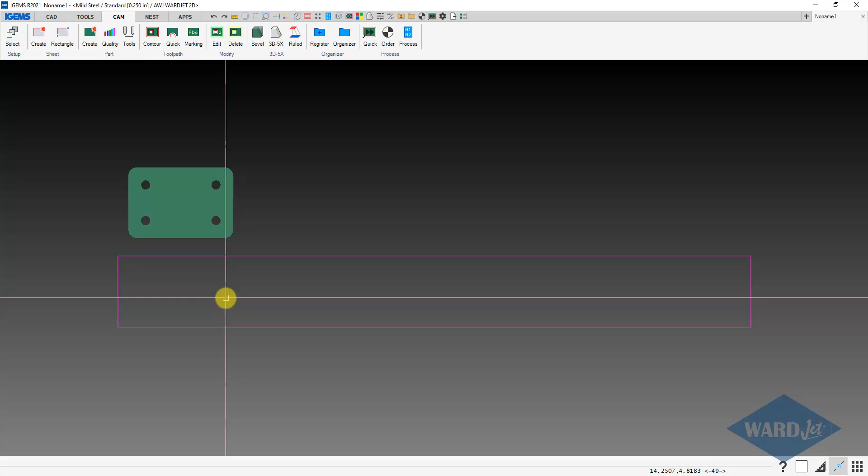You may come across a situation where you want to cut a part that's the exact width of the piece of material you're cutting it out of. So we've got a piece of bar stock here that's 4 inches wide, and our part's 4 inches wide. So obviously we want to cut the inside holes and then be able to start off the edge of the sheet.

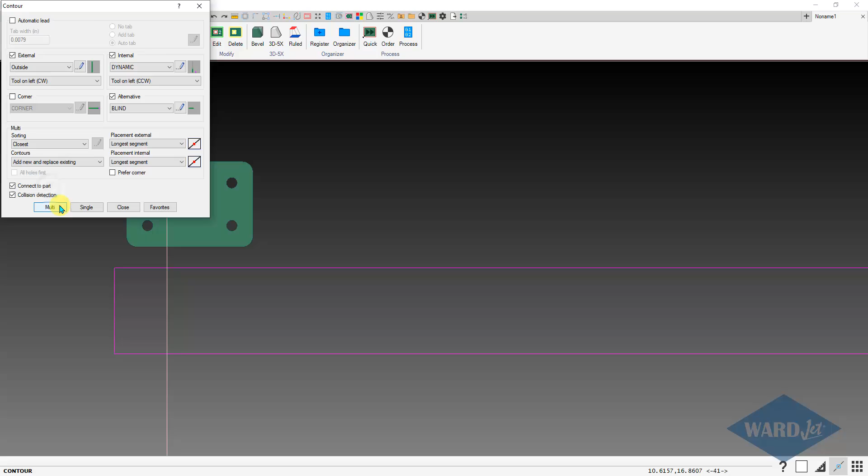Trim off one end and then come over here and trim off this other end. So I'll go ahead and add my tool path on here. And of course, if I try to just nest this on the sheet, let me stick this on the end here.

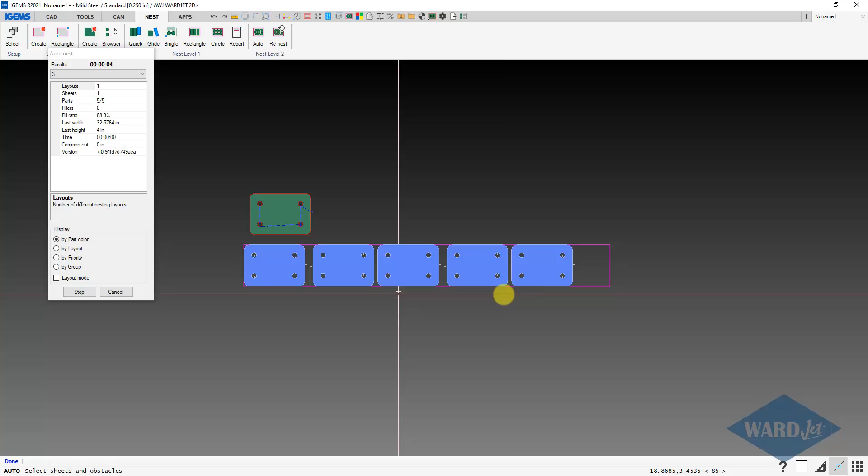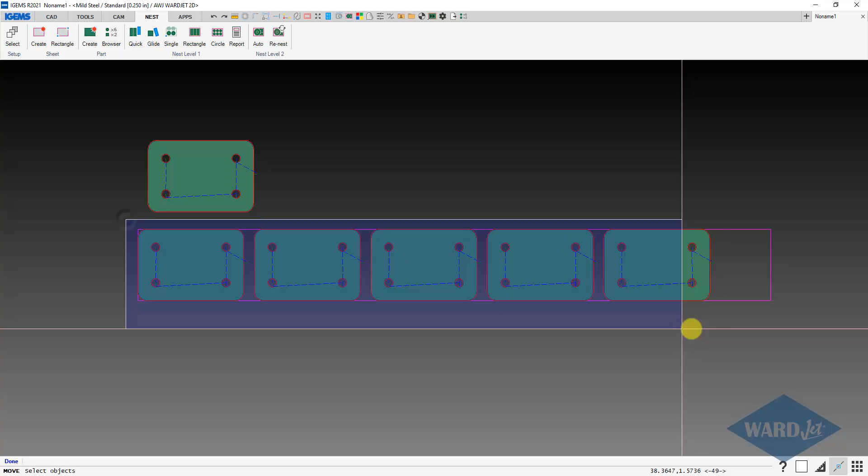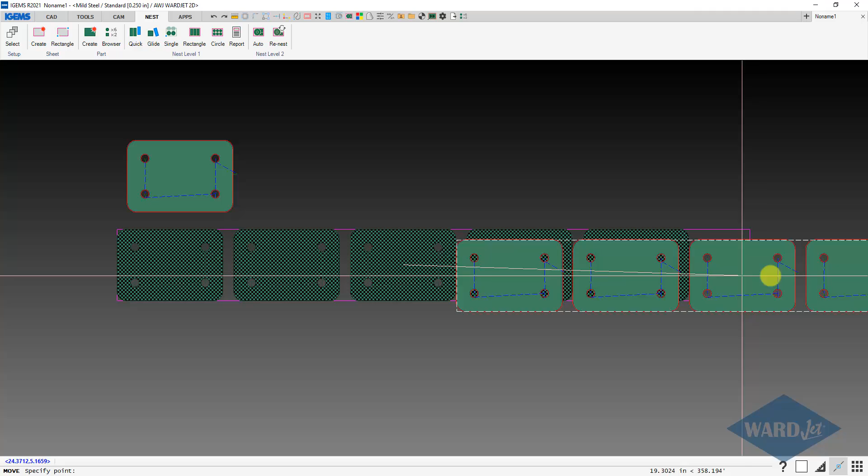And if I'm going to want to clamp these onto the end, I can slide this down center a little bit there on my sheet. If I want to be really particular about that centering, when I select the parts and do my move command, it's going to pick a point that's in the center of those. Hit enter, base point. If I do R, the R snap is the centroid, and if I hover on the perimeter of the sheet, then it'll find the center of that sheet there.

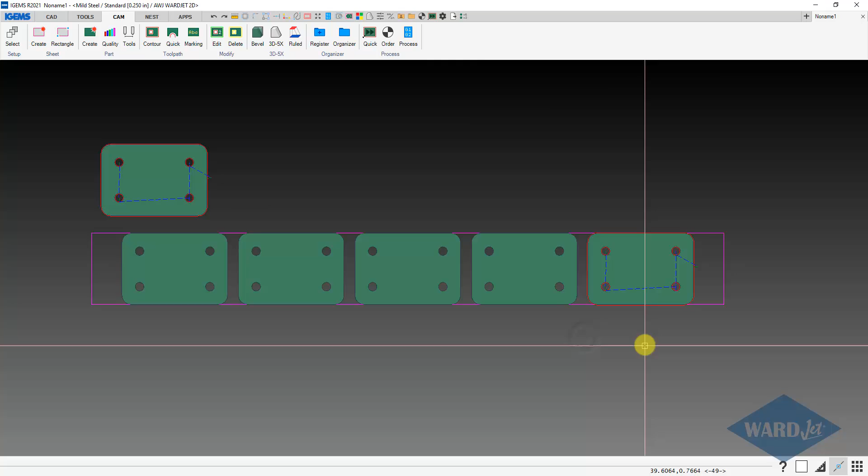So of course we try to go cut this. We've got the cuts along the edge here that we really don't need. So this is where on the cam tab, the quick command can come in handy. So I'm actually going to delete all these tool paths off of here for right now, and we're going to also delete the tool path off of this part.

And then we're going to use our quick command, and we're going to use the contour option, and I'm going to work my way essentially counterclockwise around this part. We're going to start with the cut on the right end because we don't want to necessarily do the one on the left end first, because then the part will come free from our bar stock and float.

So we'd want to work right to left on here, I'm envisioning, cutting the right end first. So we're going to start down here, have our tool compensation on the right, and then come over here and start at the top and work our way down, also with the tool compensation on the right. So we've got the contour option selected, tool on the right. I'm using the user piercing option just to pierce off the edge there. I've got a lead-in length, lead-out length, and then normally this connect-to box is checked.

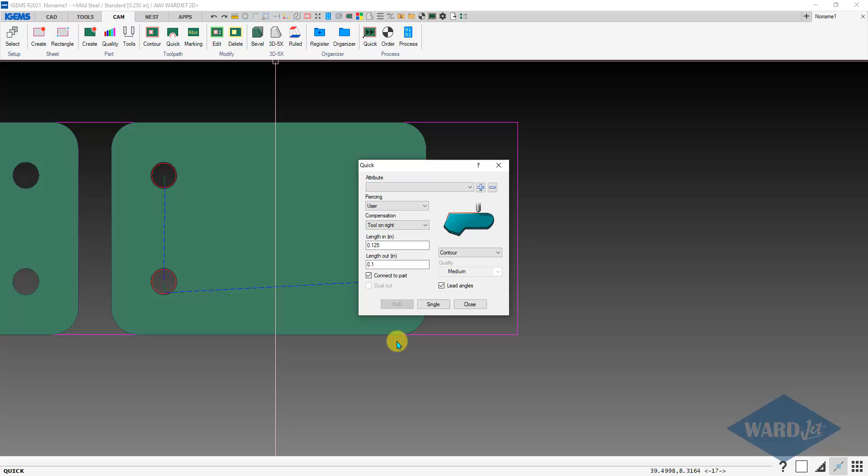We'll show you what we'll do here with that later. And then lead angles, so if you want to be able to specify the angle that you want to lead in at, you have this box checked. And click single. Down here at the bottom, select start point.

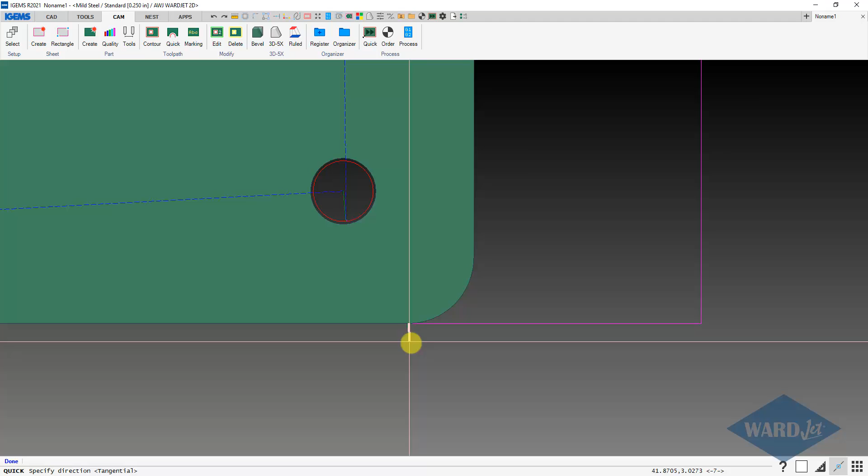So we're going to start down here. It finds the closest end point, and then we're going to left click up here so it knows where it's going to start and end. Now it just wants to know information about the lead-in, which is what it's asking for right now. So I've got my ortho currently off, so I can move this around, and I just left click in the angle I want to lead in at.

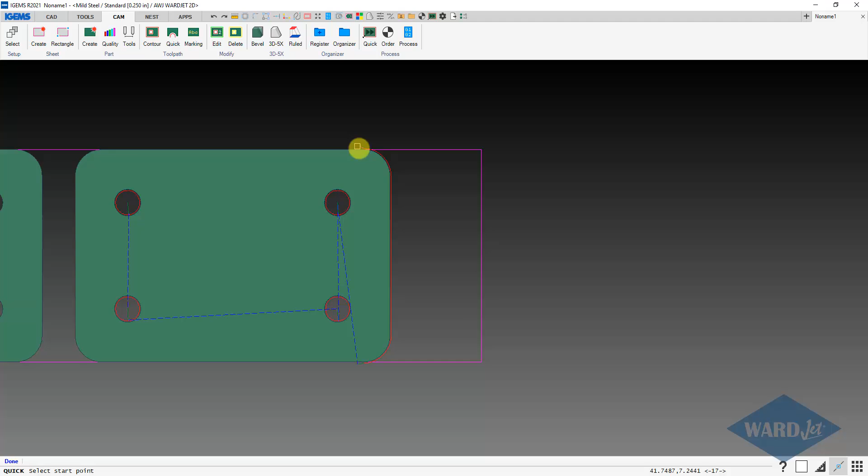And same thing for my lead out, I can position that how I want to lead out, if I want to come at 90 degrees, whatever. So we'll left click, and we've got our lead out there. Lead in and lead out, and then we can do the same thing down here at the left end. We're going to start up here this time and end down here, then left click for lead in, left click for my lead out, and hit enter because we're done with that, and close it.

So right now this tool path is connected to the part. If I click on the tool path, it selects the part.

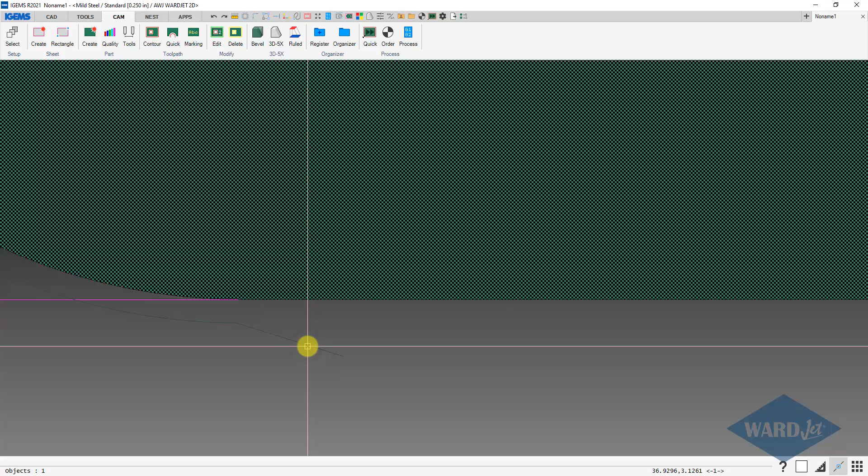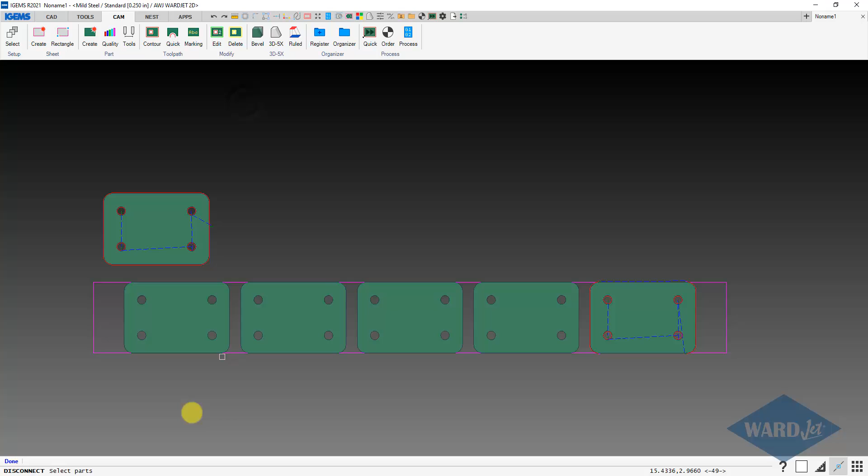So I can disconnect this tool path from the part and then copy that to my other parts, so I don't have to do the same thing 5-6 times. Under the modify submenu on the CAM tab, you have the disconnect option, and select parts. We want to disconnect from this part here. So now when I click on the tool path, you'll see that it just selects the tool path and not the parts. So now I can move and copy and such.

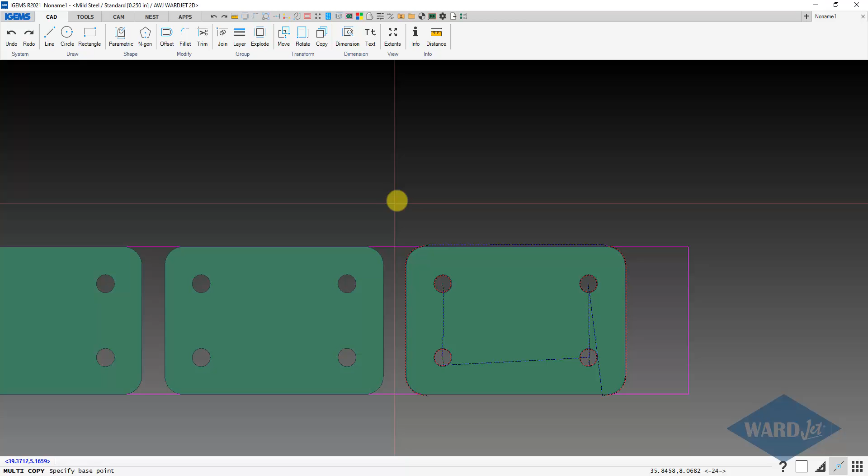CAD tab, we'll use our copy command, and we're going to select that tool path, hit enter. Base point, I'm going to go with center point. We'll go center point to center point to center point, and so on. Okay, so we've got that.

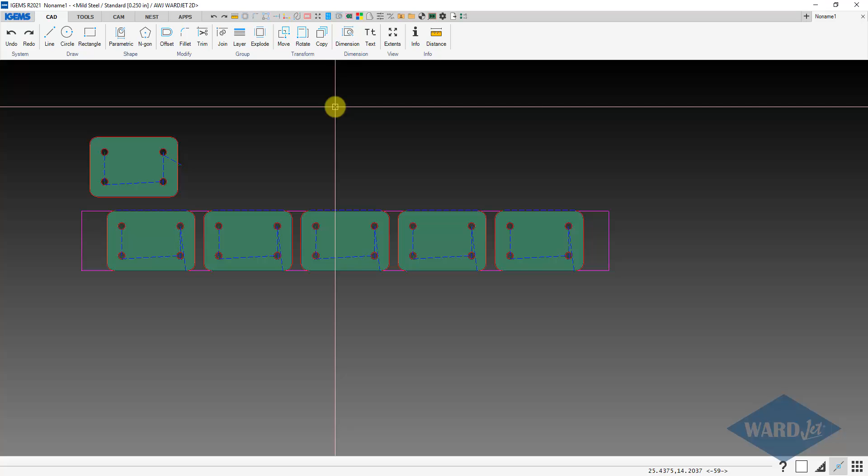So now we can go ahead, CAM tab, we can do our order button. Depending on how you've got this set, by default, you might have that set as closest.

In that case, it's going to probably start with the part on the left and want to work from left to right. Again, we probably don't want to go in that order because the parts will start floating and be free depending on how we got this clamped down and such. So ideally, we probably want to start with this part on the right.

So a couple different options to do that. You could do the right to left option. Anytime you change the sorting options, just click on sort again. It actually applies that. So in that case, it would start and do that.

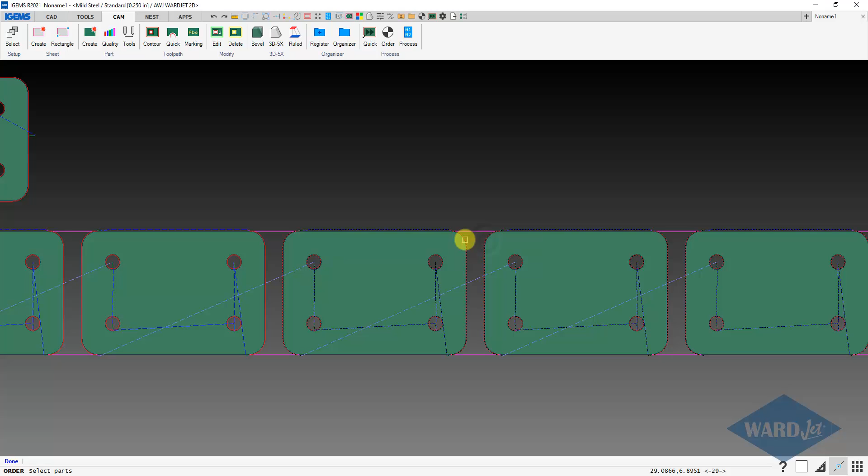The other one, if I go back to closest for fun here, the other option would be you could do manual, and if you click on sort, you would then click on the sequence that you want to do these in, which if you have a lot of them can be a little bit time consuming.

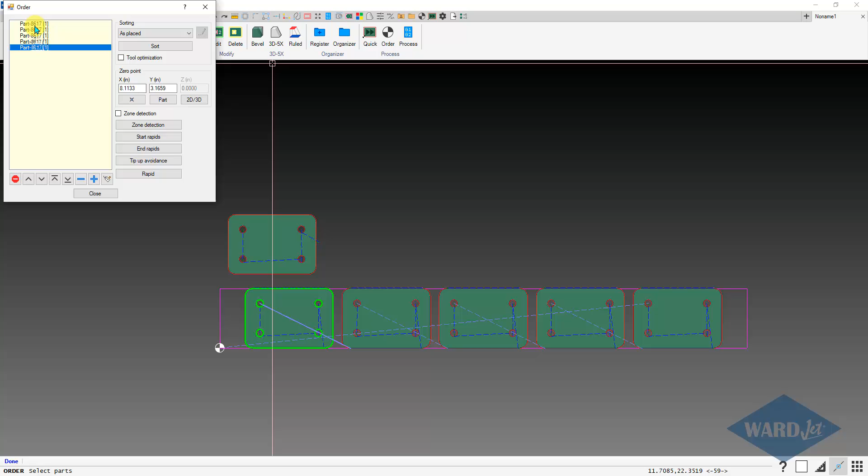But the other option would be, if I go back to closest just to make this apparent, is if you do the as-placed and sort, because we put these tool paths on the parts in the order that I want to cut them, as-placed would also follow that. So you've got a few different options there to optimize the cut sequence.

And of course the arrows down here. So once you got that, then you should be good to go. Of course we can do our process and preview it and make sure everything looks good. So we'll go down, cut the 4 inside holes, cut the right end, cut the left end, holes, and so on.